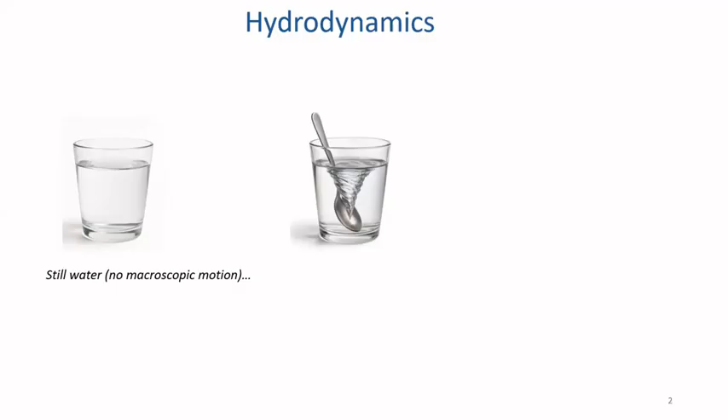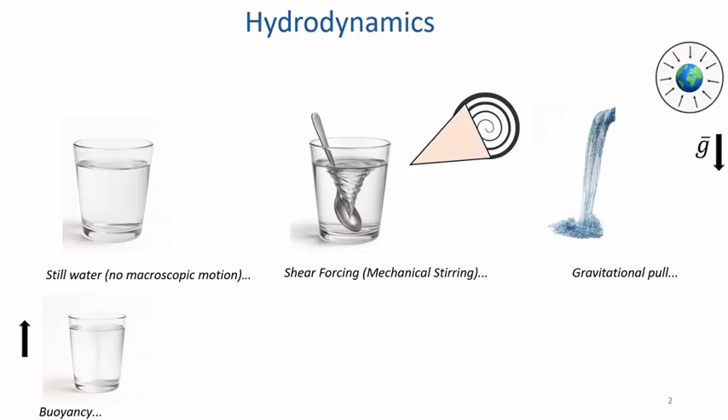Similarly, when you have your cup of water or your cup of favorite carbonated drink, you can sometimes see bubbles rising from the bottom of the cup to the top of the water. This is because buoyancy is acting. The less dense gases at the bottom rise to the top, if you are familiar with Archimedes' principle. And then if you have a pump, a pressure tank, because pressure varies with height, you can induce different degrees of motion with a pressure gradient. So this gives you an overview, in a layman's language, not in a strict mathematical sense, of what we mean by hydrodynamics.

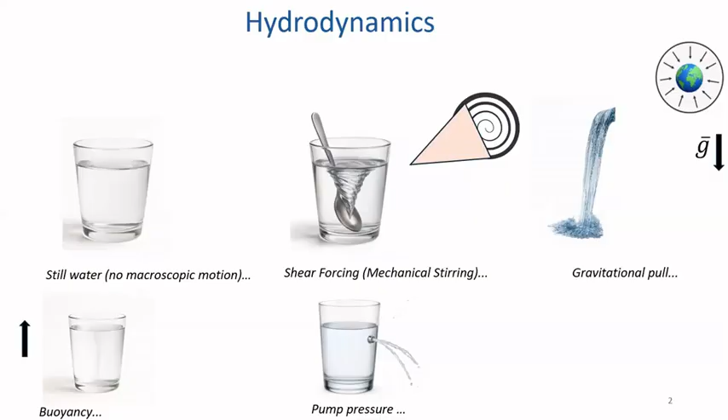And then that takes me to hydrodynamic instabilities. They are instabilities that develop when fluids are in motion. Of course, that seems straightforward. We have seen that mechanical action can cause motion, pressure can cause motion in fluids, but these different motions can also trigger hydrodynamic instabilities. And there are different types of hydrodynamic instabilities that can be observed. To conceptualize this, I give you one of the popular ones, called the Rayleigh-Bénard instability. It is an instability that is observed in fluids when you heat the fluid. And what is an instability?

An instability is a change of state when a fluid is in a reference frame, initially stable, and because perturbations to it grow in time and space, then it becomes unstable.

So this is your favorite pot on the heating surface. No heat is applied. You see that the pot is still, the water in it is still. But the moment you apply heat to the bottom, you will see this kind of cellular motion that is induced.

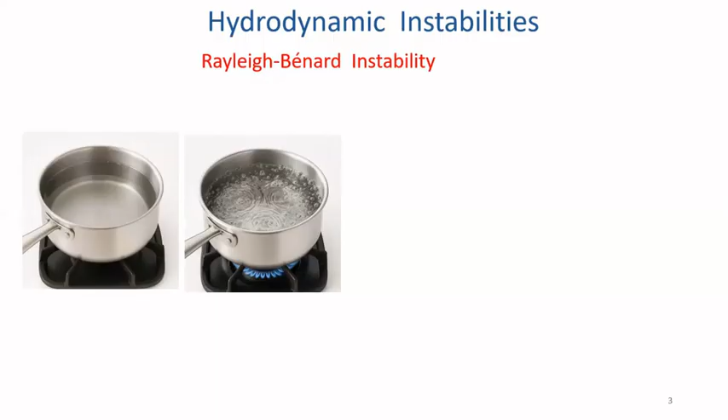What is happening here is that as you apply heat at the bottom, the water at the bottom expands. And because it expands, you have something that is less dense. And then at the top, the water is initially cool, so which is denser. So the difference in temperature triggers difference in density, and then you see this.

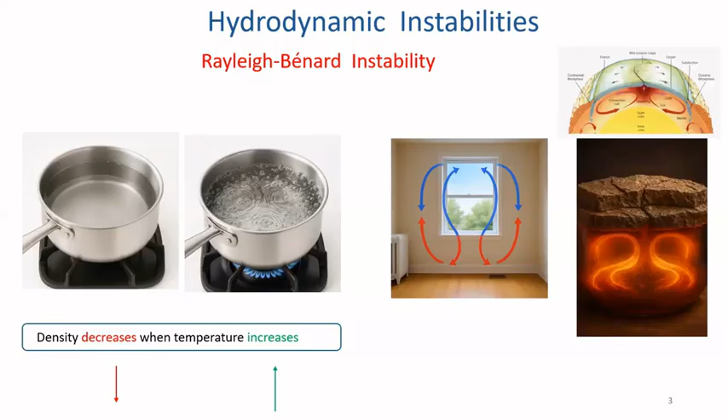And this is what is responsible for circulation of air in a room, for example. The blue arrows: if you're in a room that is initially cool, and then you apply a heater at the source, the hot air rises to the top, and then the cooler air that is initially in the room tends to sink downwards. So this kind of creates a circulation and makes instability happen. And this kind of mechanism is also responsible for transport of minerals within the Earth's mantle.

Another type of instability is what is called Rayleigh-Taylor instability, which was first studied by Rayleigh, and then it was advanced by Taylor. For you to understand this, let's say a glass of water, and then you put some grenadine on top. You know, there is water inside there, but then you are adding something that is increasing density at the surface, at the top. So you have something that is denser on top of something that is less dense.

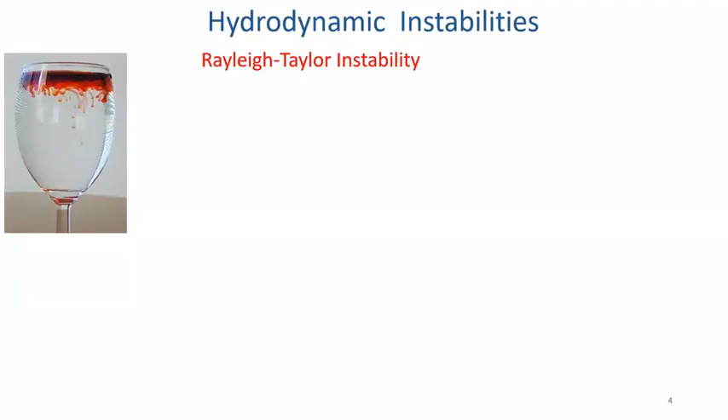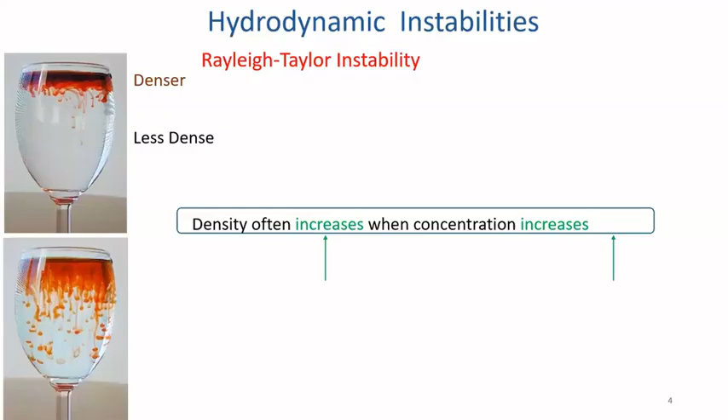Previously, we have seen change in density due to temperature difference in Rayleigh-Bénard instability. Here, the difference in density is triggered by change in concentration, change in mass. So the same thing happens when you put milk in your cup of tea. So you can see this kind of wiggling instabilities. So we have something that is denser, and density increases when concentration increases. And this is also responsible for explosion in the galaxy and for some inertial transport.

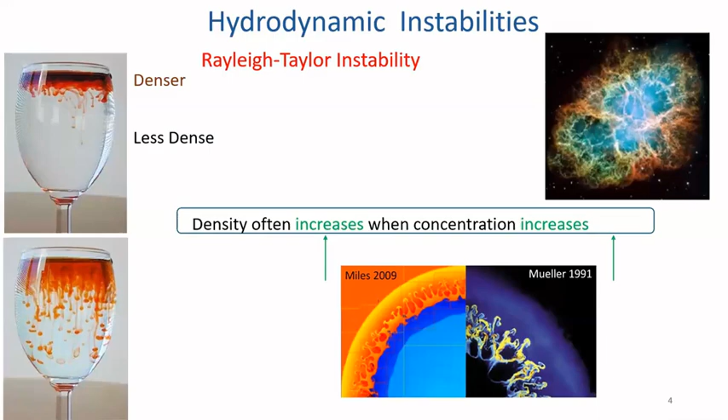Of course, this is still part of the introduction. We have looked at two setups. Now let's look at stratifications that are generic. We are not looking at coffee. We are just looking at something generic. So suppose you have a solution. In chemistry, a solution is a solvent plus a solute. That is, you put a solute, let's say a powder, you put it in water and you mix, so you have solution, different kinds of solution. Can be salt solution, can be acid solution, base solution. Your cup of tea is a solution. Your soup is a solution.

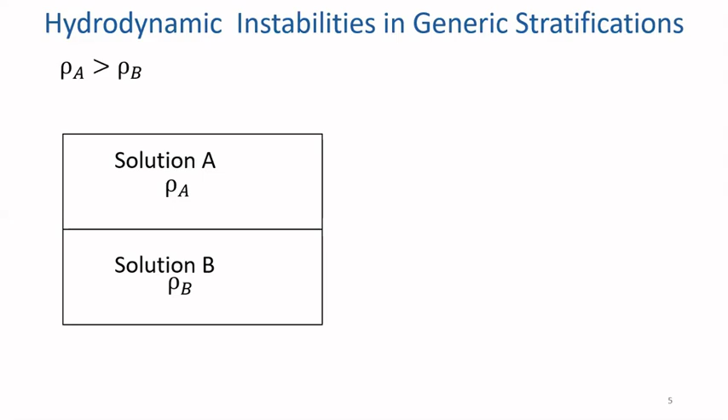So you have a generic solution A, with concentration A and density rho A, stratified over another solution B with density rho B. Based on the previous explanation, in this stratification, if the density of what is on top is greater than the density of what you have below, then you are in the Rayleigh-Taylor instability configuration. And when you do a cross-section of the profile, you have this kind of 1D profile where you have something that is denser, rho A equals 1, and for illustration, rho B equals 0.8.

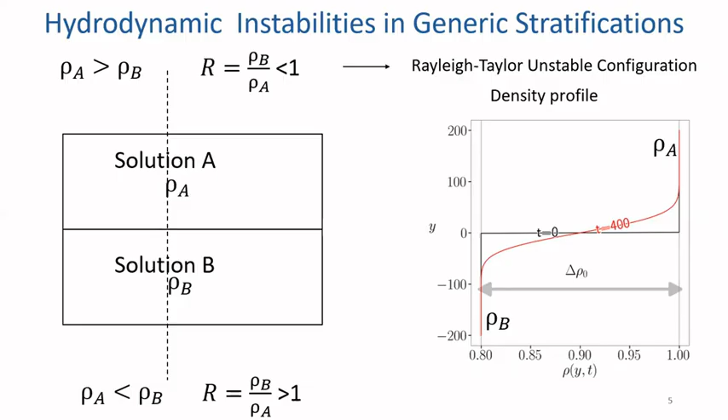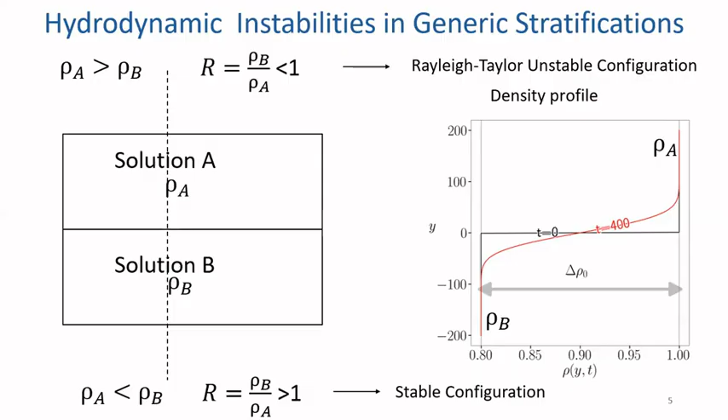In the reverse case, if what you have above is less dense than what you have below, then you can define a parameter R, which in this case is greater than 1. And for this configuration, the stratification is stable. This means that we do not expect instabilities to set in. Why? Because there is no favorable gradient in density to trigger convection. But in this kind of setting where the configuration is stable because of density stratification, there is another mechanism, which we will see now, that can destabilize this stable configuration.

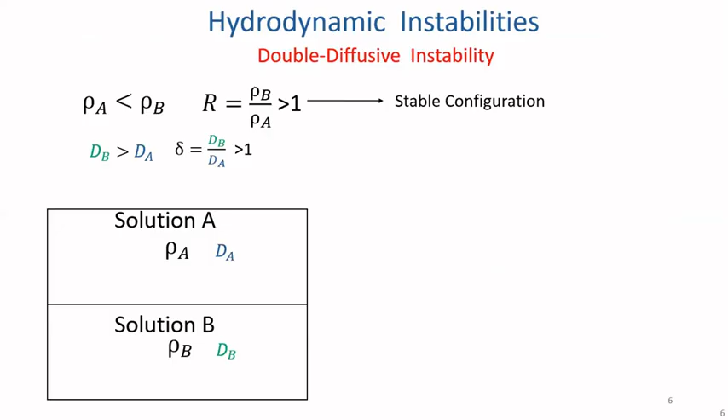And that takes me to double diffusive instability. This configuration, where what you have below is denser than what you have above, is stable. But if, in addition, we are not just looking at the density difference, but at the species dissolved in the solvent that diffuse at some rate, following Fickian diffusion, which is what we'll be looking at in this discussion. And it happens that the solutes in the solution below diffuse faster than the solutes in the solution above. We can then define a parameter, delta, which is greater than 1.

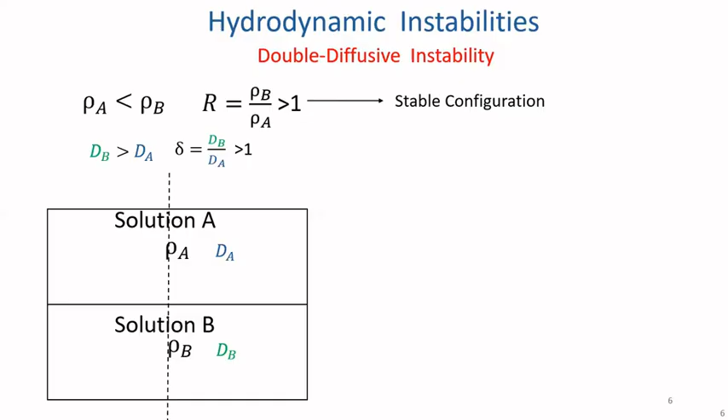Although the configuration is stable according to density stratification, the difference in diffusion rate of the solutes in the stratifications will trigger what you call double diffusive instability. And the signature of this kind of instability is that instead of a monotonic density profile developing, you have build up of extrema, that is maxima and minima in the density profile.

Initially, there is a density difference that we call delta rho naught, which is the density difference at the beginning. But once you incorporate the contribution of diffusive effects, then the actual relevant density difference is this bigger density difference that is called delta rho m. I hope you are following me.

Now, for you to appreciate this, what is happening is that the species are diffusing faster at the bottom, but that is creating a depletion region. So you have a minimum in density and an accumulation region at the top. So as B is leaving the bottom and diffusing towards the upper strata, A is filling those gaps that B leaves behind. And that's why you have extrema in the density profile.

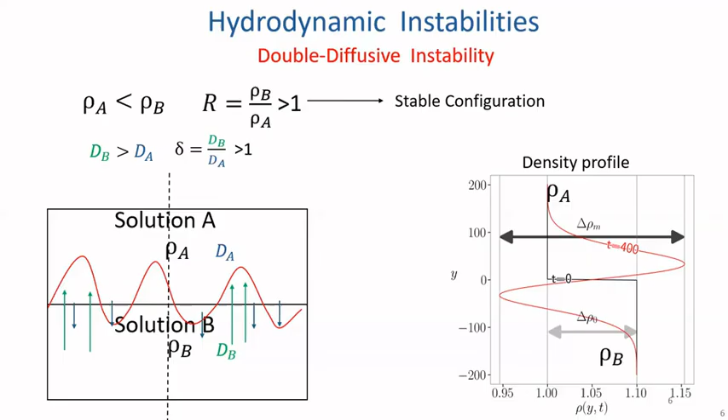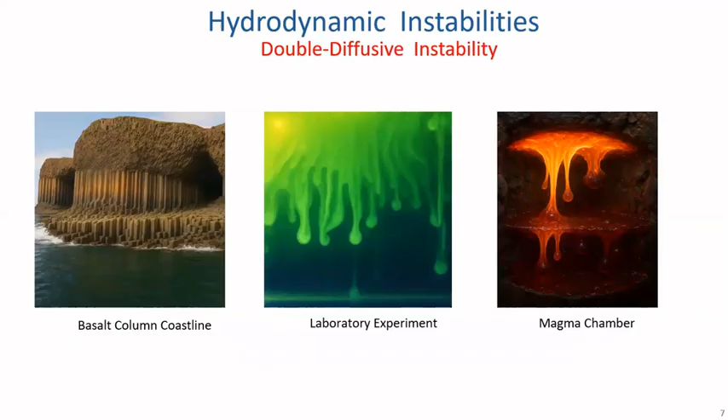And this kind of double diffusive instability, you can see it in transport of salt in oceans and in magma chambers, and it's been observed in several experiments.

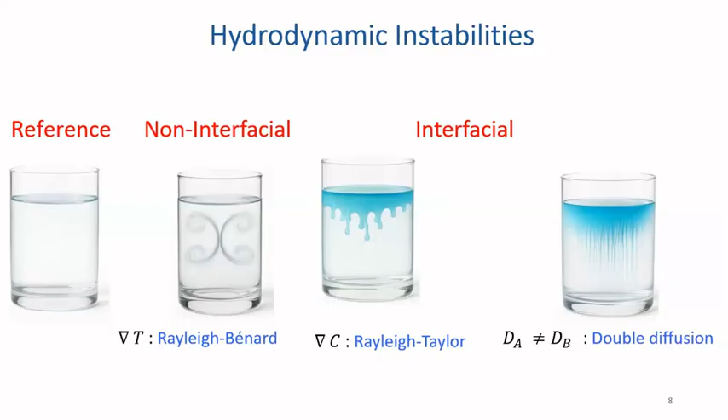In summary for this introductory part, I have introduced you to the concept of hydrodynamic instability, and in particular, I've emphasized interfacial instabilities, which are instabilities that develop at the interface of two fluids, which can happen if there is a difference in temperature, the Rayleigh-Bénard configuration; if there is a difference in concentration, and then a difference in density, you have the Rayleigh-Taylor instability. And if the species diffuse at different rates, then you have the double diffusive instability.

Why is it important, you may be wondering, to study this kind of system? One of the reasons why it's important to study this kind of system is that it helps us to mix two fluids. What does that mean? Look at this simulation, for example, which is what I've been trying to explain. We have a fluid A layered on top of B. Initially, they are diffusing into each other, which is the green region in the interface.

And as time passes on, you see the deformation of the interface into finger-like patterns. And then the two fluids begin to interpenetrate into each other. What happens is that these fluids begin to mix. And what does mixing mean? It means concentration begins to be homogenized in space and time.

This is useful because you just make your stratification. The only thing you put there is density difference because of the choice of the solutions that are stratified, and the fluid mixes by itself. As someone would say, this is an energy optimization problem. You are not putting something there.

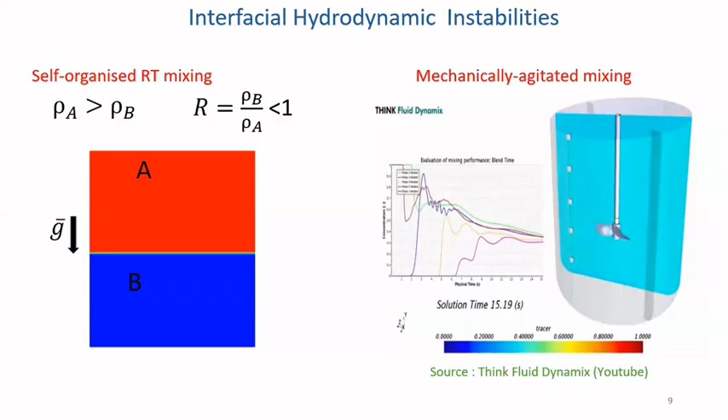This is in contrast to what you do with your blender when you are cooking in your kitchen, for example. You need to turn the blender, and to turn the blender, you need an electrical source to mix your recipe, whatever you're doing. So this can be useful in cases where you are producing pharmaceutical products that, when you shear them, when you apply mechanical action to them, you can destroy the relevant constituents in them, among other applications. And even in CO2 sequestration, maybe if time permits, so that I don't stay too much in the introduction part.

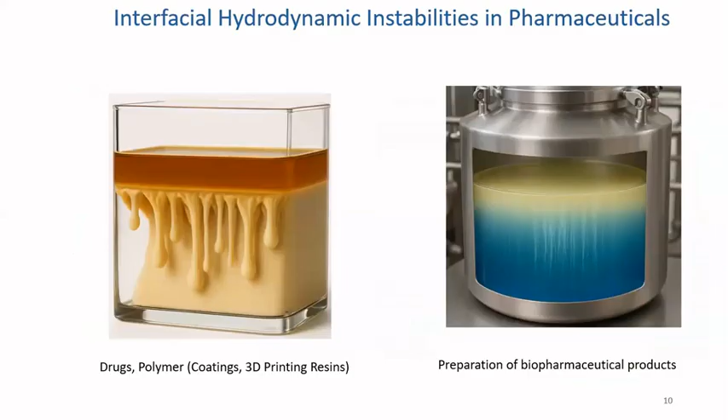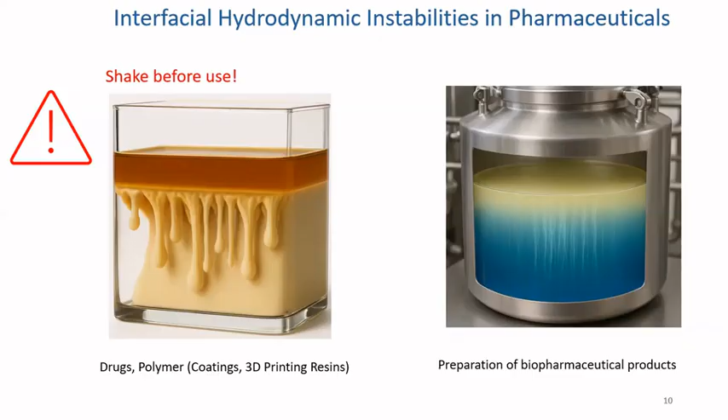So these are some of the applications, and this is a pharmaceutical application, for example. And I know you must have seen on drugs the notice shake before use. Why do they say this? For example, if what you have is some emulsion, if you let it sit on the table for some time, you can see that it separates into layers. So if you just drink what is at the top, then you are drinking what may not heal your body. So those are practical examples. Of course, there are different examples that we can use.

So what do we want to answer? According to the topic, we want to look at the role of diffusion and the role of chemistry in influencing, in controlling the mixing that we have, and how can we choose the parameters that help us to control the mixing, and also importantly, how can we determine a priori that, okay, I want this degree of mixing.

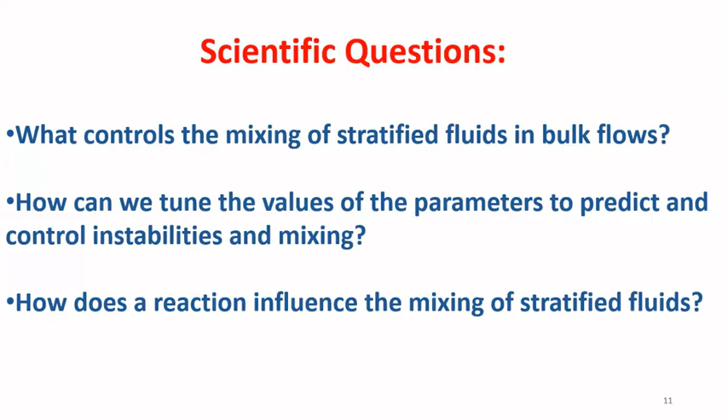I want my mixing to start by 10 seconds. I want it to start, no, much later. I want it to start by 1 hour after stratification. I want it to be this fast. What are the things that we have to control? So these are the scientific questions.

And this takes me to the framework for discussing my research, which is chemohydrodynamic instability, which summarizes the introduction again. You have a concentration gradient, a difference in concentration, that triggers a mobility profile, which is density, viscosity, permeability, and then triggers hydrodynamic instabilities, which induce hydrodynamic flow.

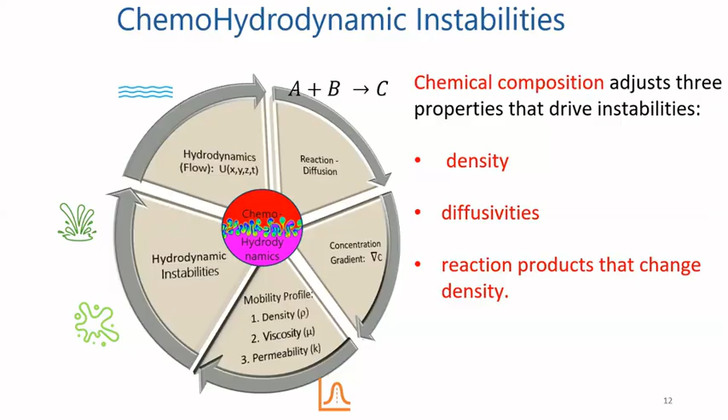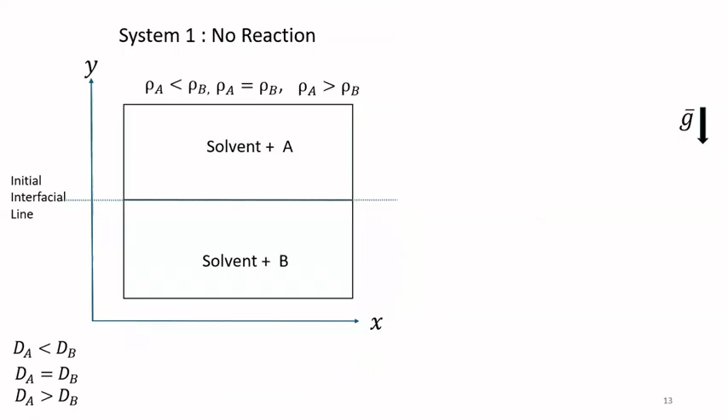And sometimes we will see that reaction, just like diffusion, can trigger instabilities in some framework. And in this case, it will be important for us to see how reaction influences things, changes the density profile, etc. We will get there.

So I will first look at system 1, which I've shown you, solution A on top of solution B, and we'll look at what if solution A is less dense than B, what if they are equally dense, what if this is more dense, and we'll look at difference in diffusivity. And then system 2, we'll look at the situation where the solutions are reactive and they are producing a new product in situ, on the go at the interface.

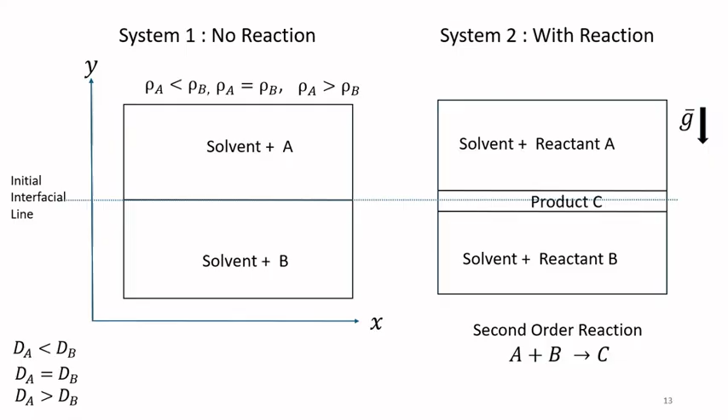They are synthesizing something. For example, from high school, if you do an acid-base reaction, you produce salt, a salt solution and water, among other things that you can produce. This is modeled by the second order reaction, A plus B gives C.

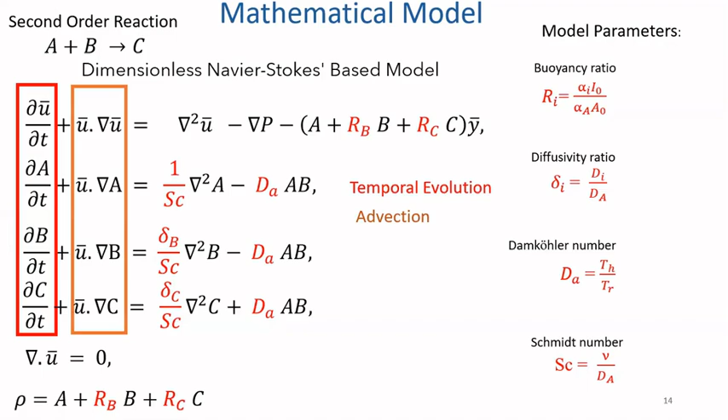The terms highlighted in red account for temporal evolution of the velocity and concentration. As the velocity is changing, the fluid becomes entrained and the concentration is advectively transported. So you have this highlighted term accounting for advection, diffusion and temporal evolution. And this highlighted term in purple are the reactive terms.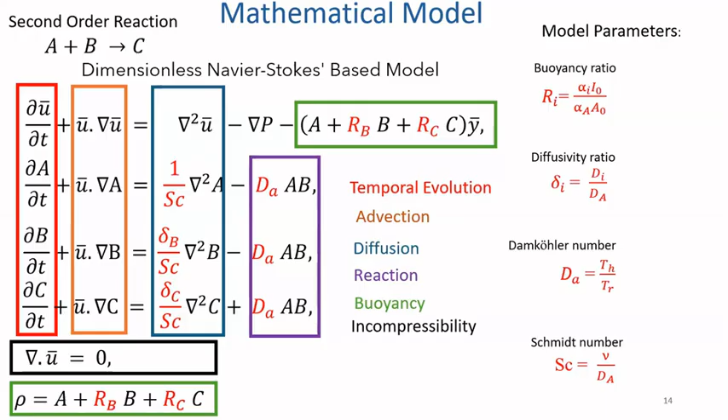And for the action of buoyancy, that is, you are in the gravitational field, this accounts for the buoyancy force on the fluid. And like I said, we are solving this under the assumption of incompressibility. This essentially means that we are looking at solutions that behave more or less like water. We are not looking at gas that expands uncontrollably. We are not looking at combustion. So there is incompressibility there.

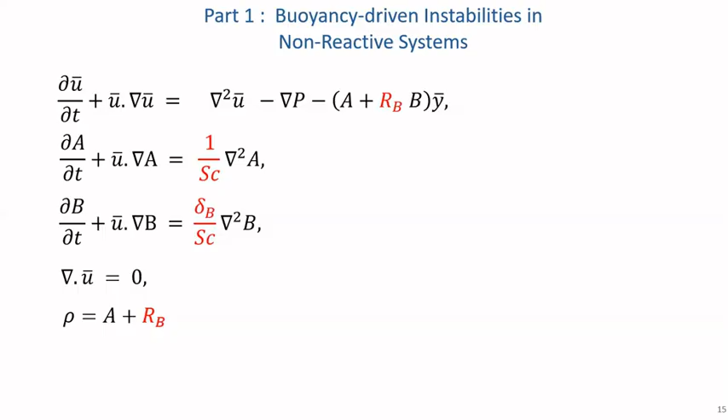Okay. For the first system, we look at the non-reactive system, part 1, so we take the reactive terms away. So no reaction. You have the Schmidt number, the delta parameter. And for this simple system, when there is no reaction, if my R is greater than 1, I think you've seen this before, my system is initially stable. I do not expect instability.

On the other hand, if it's less than 1, it's the Rayleigh-Taylor instability, RT, that I've shown to you. And if delta is greater than 1, you can have a double-diffusive mode. If it's greater than 1, I remind you again that what is below is diffusing faster than the species at the top. But when delta is less than 1, what is below is diffusing slower than what you have at the top.

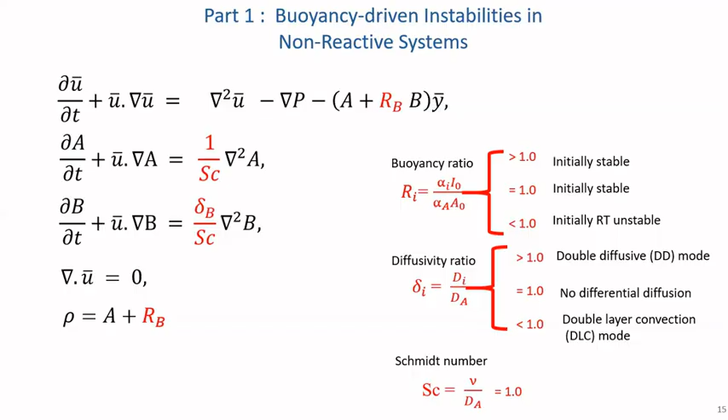For simplicity, we fix the Schmidt number at 1. Typically in real-life applications, you have the Schmidt number of chemical solutions around order of 100 and 1,000, but this may make the solution stiff. We have solutions for that which I will not present, but let's just keep it simple.

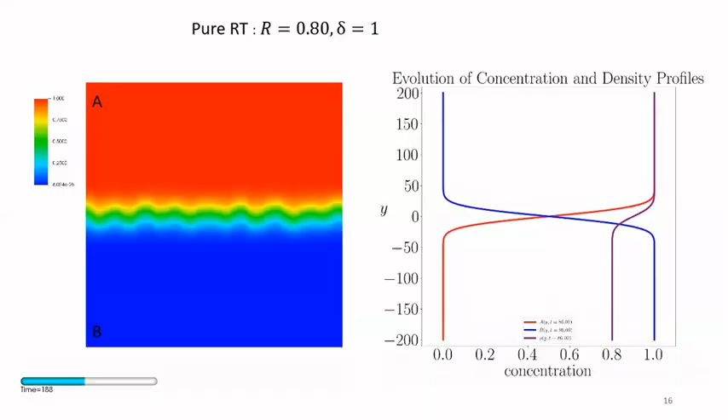So you've seen this that I introduced to you earlier, and this is the deformation of the interface because of the action of the diffusion. The fluid is diffusing into each other, and then you have A and B. And then when you do a cross-section, you have your A, you have your B, and then the density profile, which is a linear combination as defined in this problem of concentration of fluid A and fluid B. So let's leave this.

For the Rayleigh-Taylor problem, R less than 1, delta equals 1. That is, there is no difference in diffusion rate. The only difference is that the two species have different densities. By just varying the values of R, we can see that we can already influence the mixing. If R is closer to the value of 0, we see that at time t equals 125, the destabilization of the interface happens much earlier, and then the homogenization is

fast. But when R is closer to 1, which is closer to the stable value, there will be destabilization at the end of the day, but it's more delayed. So for me, I'm happy that I can choose solution pairs based on my goals to delay or to enhance mixing based on the density stratification alone.

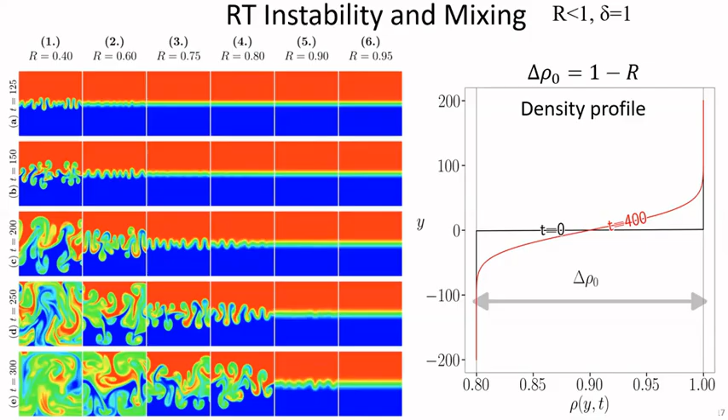And for you to appreciate these qualitative results, we follow this mechanism where we define what we call the mixing length. And what is the mixing length? The mixing length tends to measure the degree of interpenetration of the fluids into each other. Early on, we have diffusive mixing. So this grows as square root of time, which is classical and characteristic of Fickian diffusion.

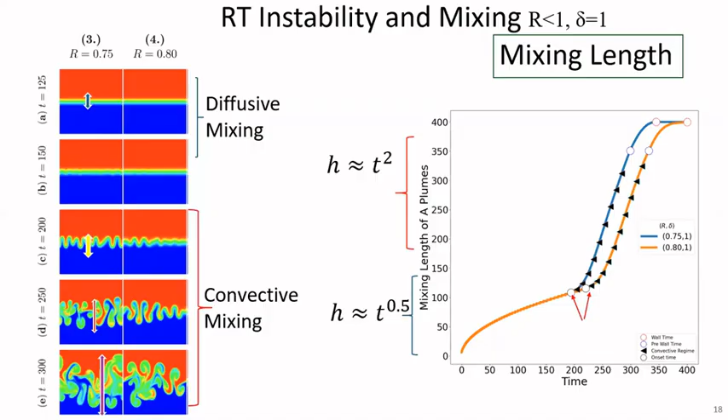But later, when convective motion sets in, then we see a motion that grows as a quadratic function, the interpenetration of the fingers. So this is characteristic of free fall motion. If you remember your physics, this is characteristic of free fall motion when the distance h is equal to half g t squared. But there are theories for this. And why do we measure?

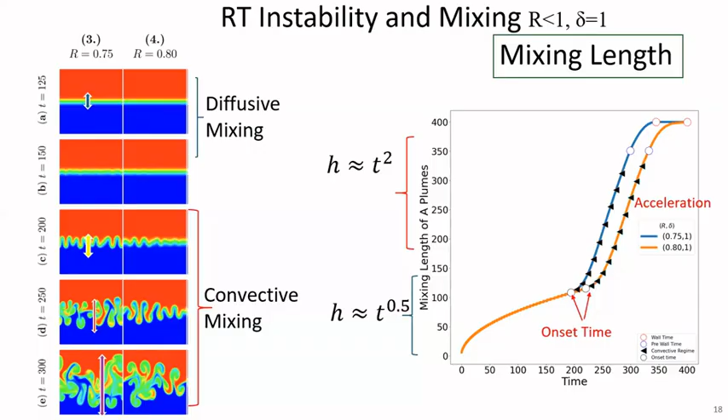Based on this quantification, by following the evolution of the interface, we can already define the onset time, the time that the mixing transitions from diffusive mixing to convective mixing. And we can also quantify the acceleration, how fast the fluids are going into each other, by looking at the slope of this curve in the convective region. So these are our quantitative parameters. We've defined this density difference.

Okay, and what we find is that there is indeed a correlation between the time that the instability sets in and the initial density difference. So this is a power law. So without doing the experiment, I've done the experiment. You just have to come to my results. Or to have my instability set in at time XYZ, you put it into this parameterization and you have your result.

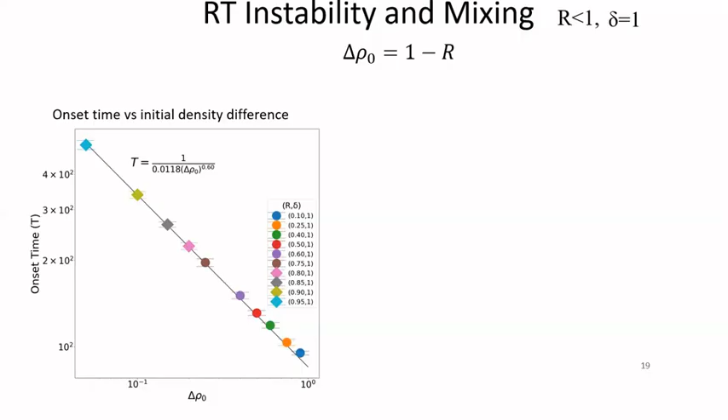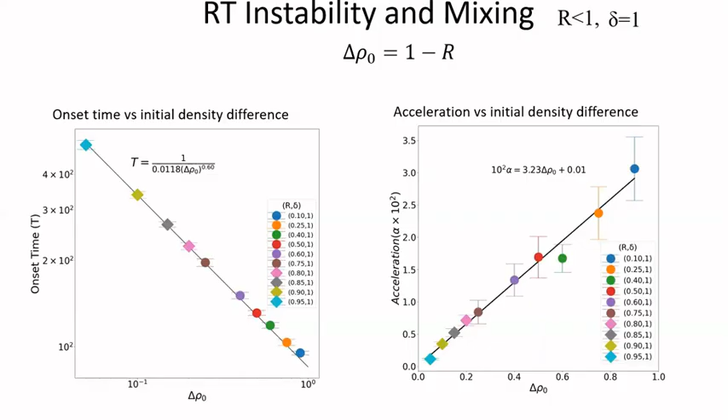Similarly, the degree of acceleration also scales as a linear function of the initial density difference when you have an RT configuration. On the contrary, when there is double diffusive motion, like I've said, we are no longer looking at delta rho naught, which is the initial density difference, but then we are accounting for the dynamic density profile. This you can compute analytically if you look at my paper.

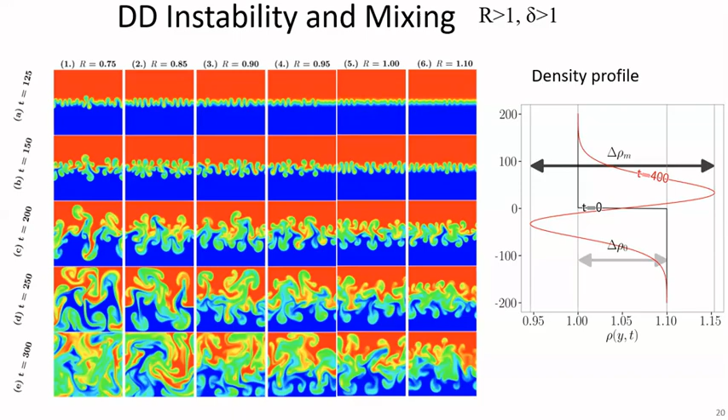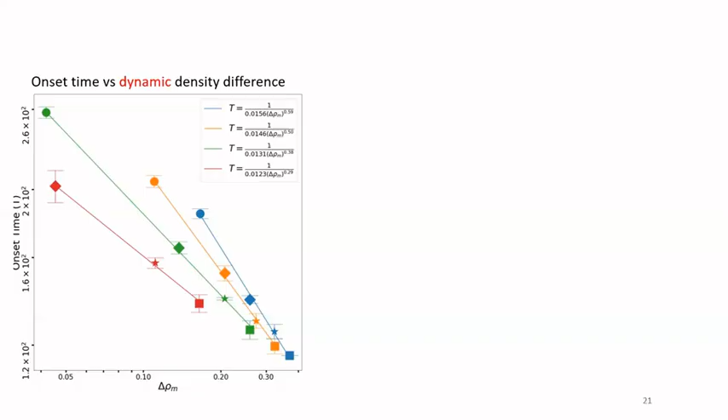And then I will show you now that if you try to correlate the onset time and the acceleration rate with the initial density difference with this kind of setup, you are going to fail. But once we correlate with the dynamic density difference, then we'll find it. You see, the onset time versus dynamic density difference gives us this power law, like we saw in the Rayleigh-Taylor case where there is no difference in diffusion rate. So this is how the density profile looks for the ones highlighted.

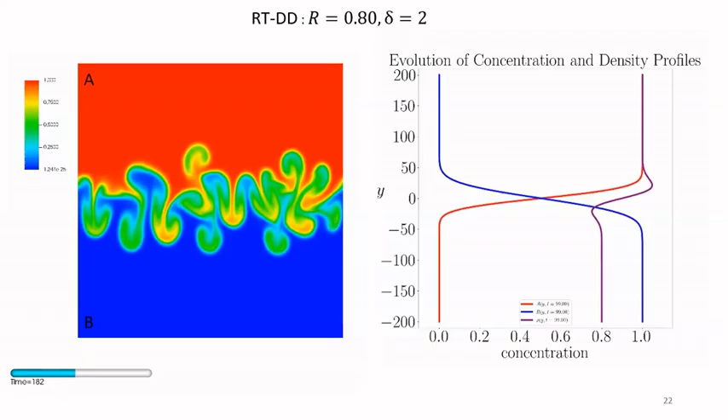And if you look at the acceleration rate, it's delta rho m, that's the emphasis, not delta rho naught that was initially there. And this is just for you to appreciate what is happening. You can see in real time that there is a build-up of minima and maxima in the density profile. It's no longer monotonic, but you have a non-monotonic density profile. And so once there is a difference in diffusion rate, you do not control your mixing by the initial density difference, but rather by the dynamic density difference.

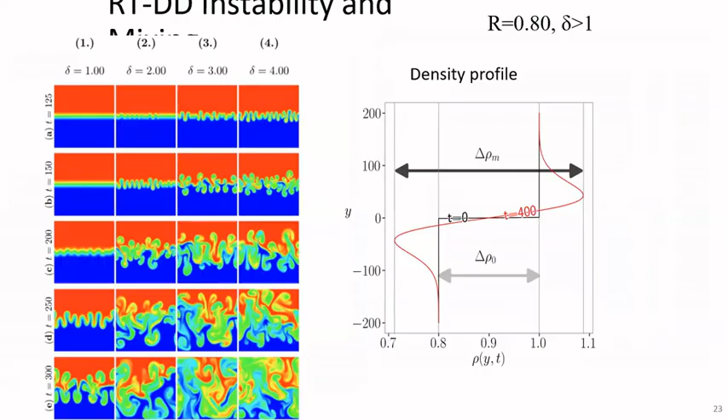Okay, let's leave that. And you can even have more interesting results when you look at the combination of Rayleigh-Taylor modes and double diffusive modes. What does that mean? Delta equals 1 is the reference case, the Rayleigh-Taylor case. But when R is less than 1 and delta is greater than 1, you can see that the mixing can be even much more enhanced, happen much faster.

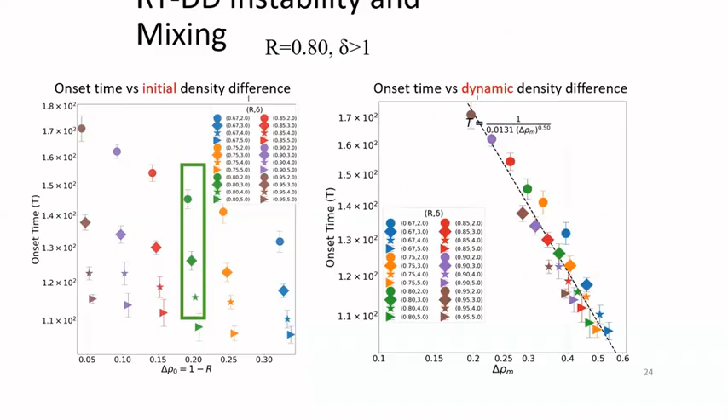And this is the correlation for delta greater than 1. We see a scatter plot when we try to correlate with delta rho naught. You do not see a nice trend. But the moment we recalibrate with delta rho m, we find our scaling again. Same thing goes for the acceleration rate. And then I did a lot of numerical experiments, and this kind of summarizes it. We can discuss this later.

In summary of this part 1, we can see different behavior if the species, the solutes that are dissolved in our solution, diffuse at different rates. If delta is less than 1, the mixing can be much more delayed. If delta is greater than 1, it can be much faster. So the question I ask is, how fast do you want your mixing? Do you want it slower? Do you want it faster? Then you can leverage on this.

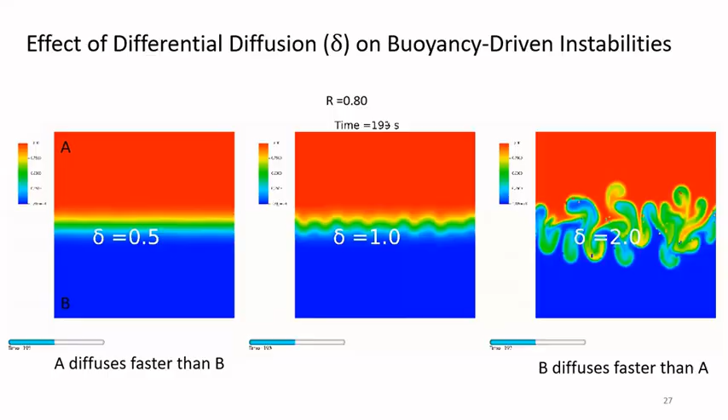Not to waste time on this simulation. I don't know why it's behaving weird, but you can see. Okay, I leave the key message because I've explained this again and again.

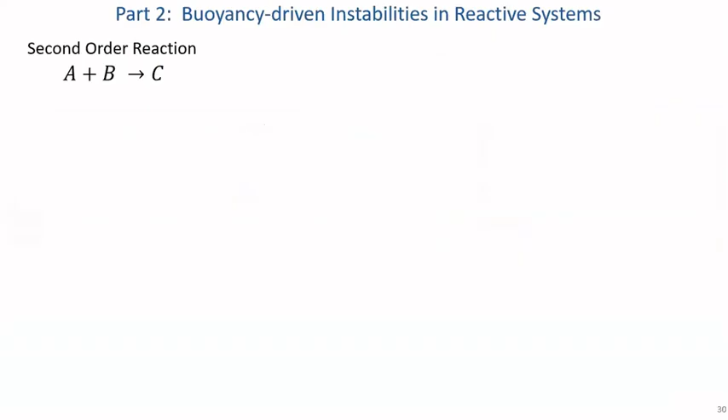Now, you ask, what happens if there is reaction happening? So that takes us to the full model that I was looking at. But to keep things simple, we isolate the effect of differential diffusion. We assume the species are not diffusing at a different rate. We also keep our Damköhler number 1, which means chemical transport, reactive transport, and hydrodynamic transport are comparable initially. So the only thing we want to change is the buoyancy ratio. We have two, RB and RC.

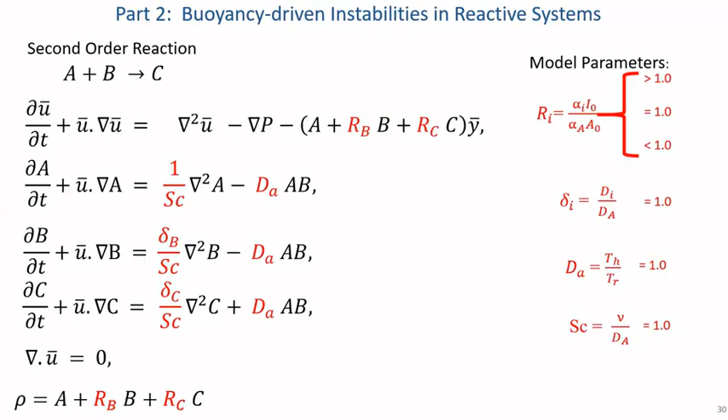RB is measuring the density of solution B relative to solution A, and RC is measuring the density of solution C, which is the new product that is being formed, relative to solution A. So solution A is the reference solution, which is the one at the top. So what happens? In the simple case, if RB is equal to 1.0, which is similar to the R that we saw previously, the system is stable.

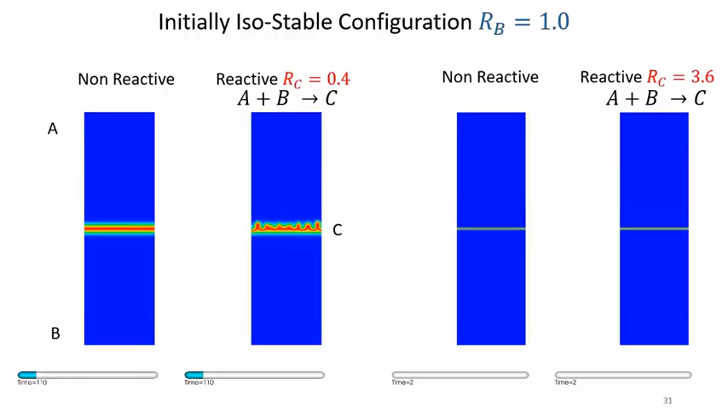But if it happens that a product that is less dense is produced, as on my left-hand side, RC 0.4, the non-reactive case is stable. The only thing you see is diffusive transport at the interface, but reaction is able to break this stability and destabilize the problem. And if a much denser product is formed, we see again that reaction is able to destabilize. But what is the difference? We can also see another control.

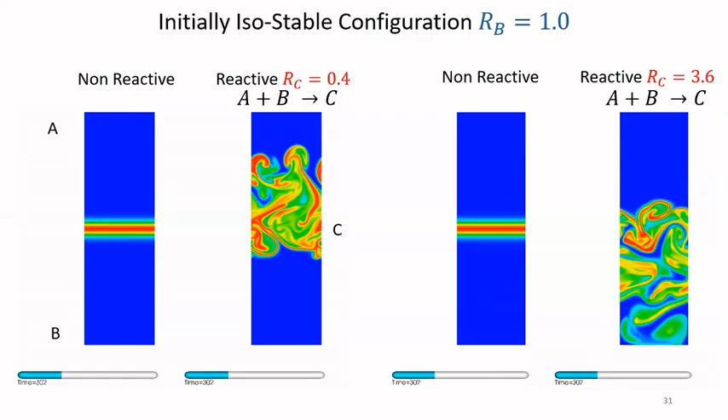I can influence the direction of the propagation of mixing by choosing or synthesizing products. So depending, is this a waste product that you want to flare into the atmosphere or something that you want to transport into the subsurface? So you can leverage this already.

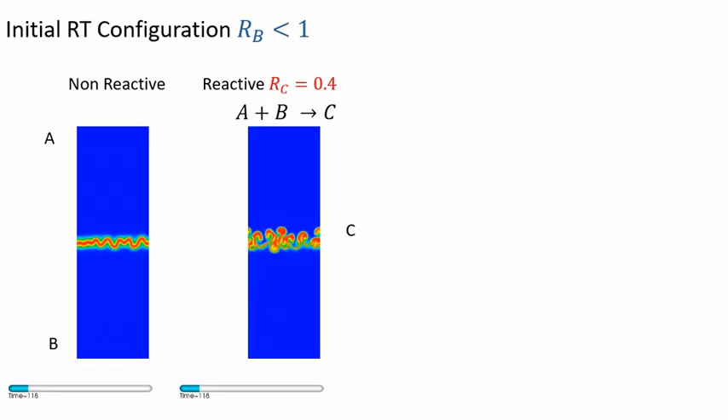And in the RT case that I've shown you, when RB is less than 1, what do you see? In the non-reactive case, you see diffusive propagation and then deformation because it's initially unstable. But then, with reaction, the mixing is much more enhanced. It happens much faster. And let me play this again.

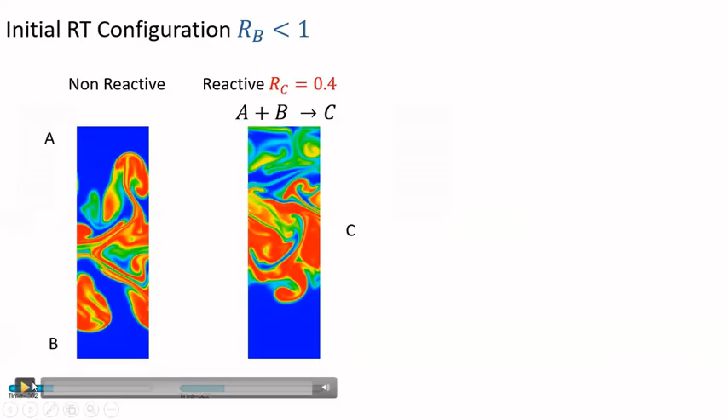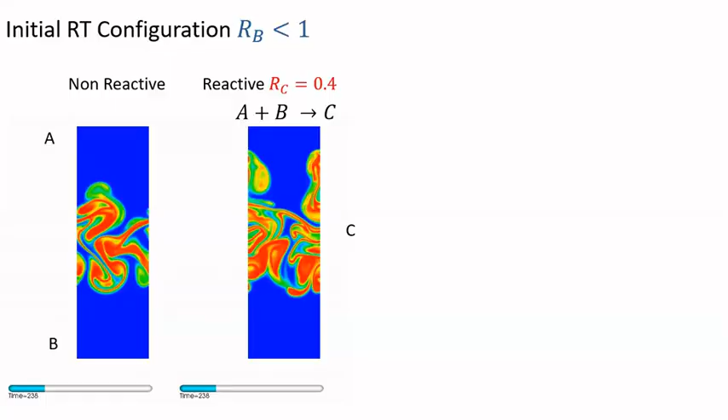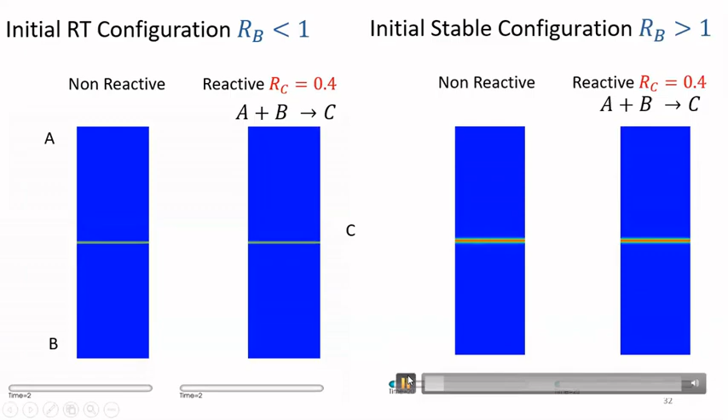In the non-reactive case, the plumes are symmetric. That is, they tend to form symmetric fingers across the interface, but reaction breaks that symmetry. And again, if this configuration is stable, reaction is still able to destabilize the interface. So you want to wonder what is happening. It's similar to what we saw earlier.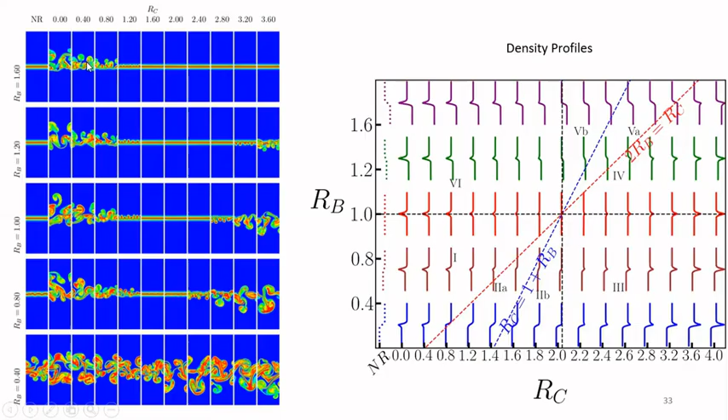And in the stable cases, where the stratification is initially stable, RB 1.6, in some regime, you can trigger instabilities thanks to reaction. Okay, so that kind of summarizes this. And then we quantify these nice patterns that we have seen. At what time does instability set in?

We see that for the non-reactive case NR, instability sets in when it happens to set in. When it's stable, instability will not set in. But when it's unstable and instability sets in, the instability sets in at a time more than 100 seconds. But with reaction, we can see the instability setting in below time 100. And in some cases, we can even delay it.

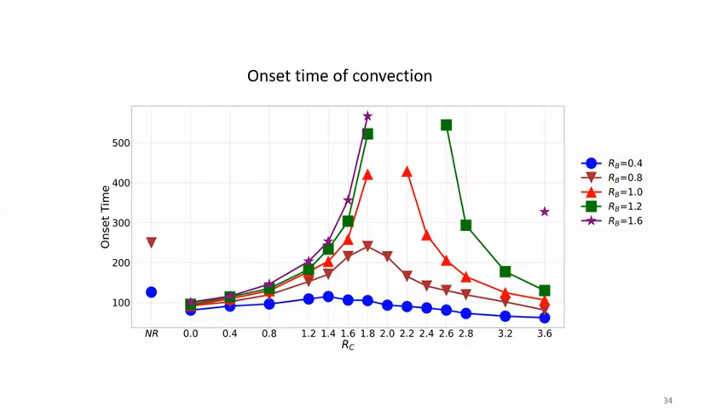So this is a nice way. And the places where there are no scatter points are the places where the reaction is not dense enough to trigger instability. I have told you that we can also influence the directionality of the fingers that form. So this kind of characterizes the trajectory. You can see at early time where diffusion is happening, the reaction zone where the reaction is more intense stays closer to the interface.

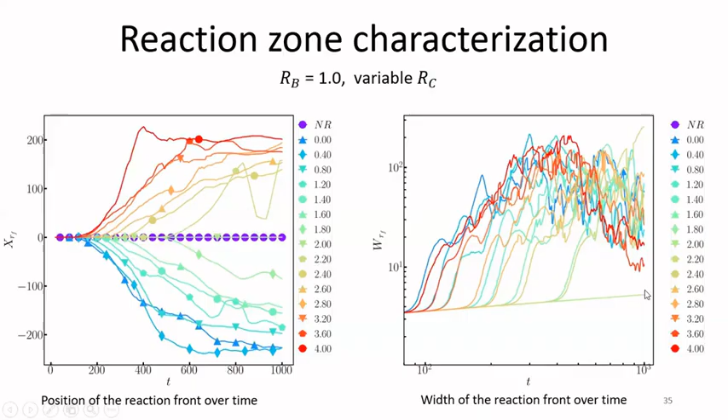And then for some dense products, the finger tends to rise. And then for some parameters, the fingers tend to sink. Similarly, the width of the reaction zone can expand. If there is no reaction, it usually follows a square root of time, but then you can make the reaction zone expand in time. And then for somebody that is interested in mixing, this is a kind of parameter with which we quantify the mixing that happens.

It's called the scalar dissipation rate, chi. And it's designed this way, if you add up this equation and then you do some transformation. So the scalar dissipation rate is just measuring the variance of concentration. How far away is the concentration from the mean concentration? And if you do a volume average of this scalar dissipation rate, then you have this kind of trajectory.

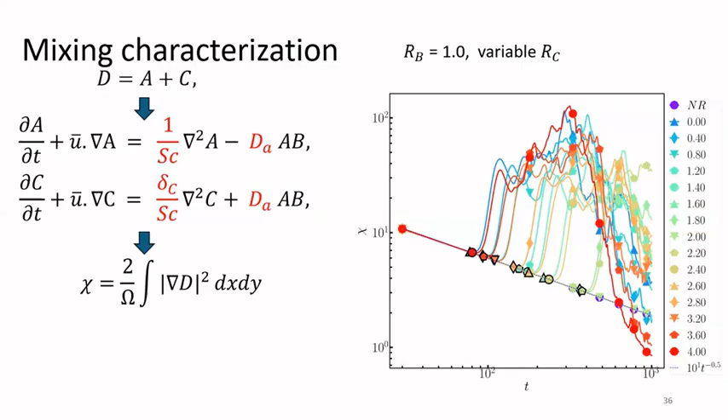What does it mean? How do you know when the fluid is mixed? When the scalar dissipation rate is closer to 0, then the fluid is mixed. When it's closer to 1, it means the fluids are segregated, still unmixed. And with reaction, we can see that it approaches this red dot, RC 4.0. With reaction, the mixing closes faster for some parameters than for that parameter. Of course, I have different plots, but I cannot show the results in this talk.

And then from a chemist perspective, we know that something is being synthesized at the interface. How can we quantify the yield? I remind you, what is being formed, depending on application, may be a useful product or something that is harmful, that you want to suppress its formation. And we see that when the stratification is initially unstable, RT unstable, the product yield is much more enhanced. You form much more new products.

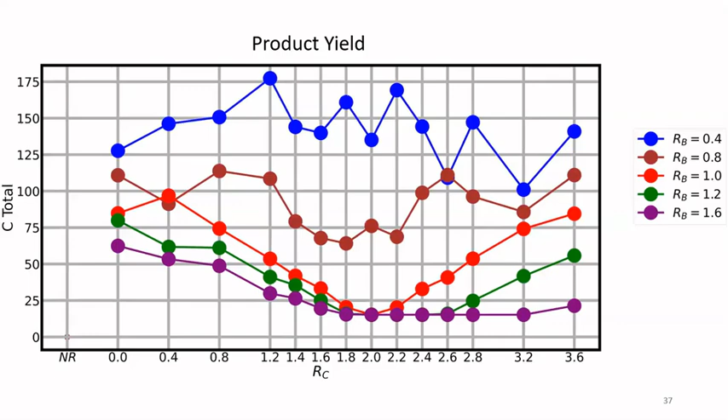And when the stratification is initially stable and reaction is happening at the interface, you form some product, but it's not as intense. So depending on application, you can already choose your stratification to end up in some regime. And the key message is that compared to non-reactive cases, reaction enhances faster onset of instabilities and intense mixing. Unstable reactive mixing is more efficient in product yield than stable reactive mixing.

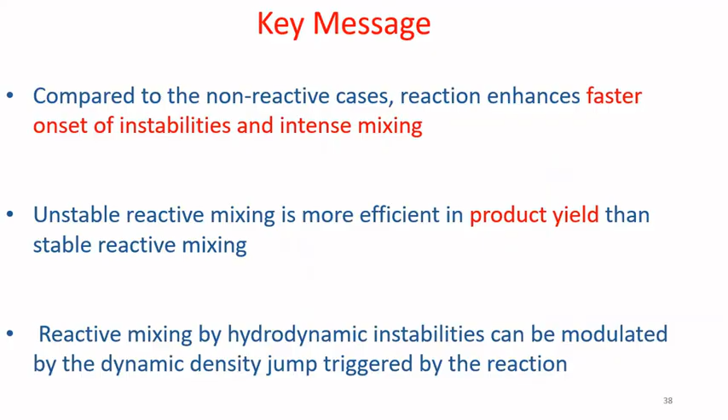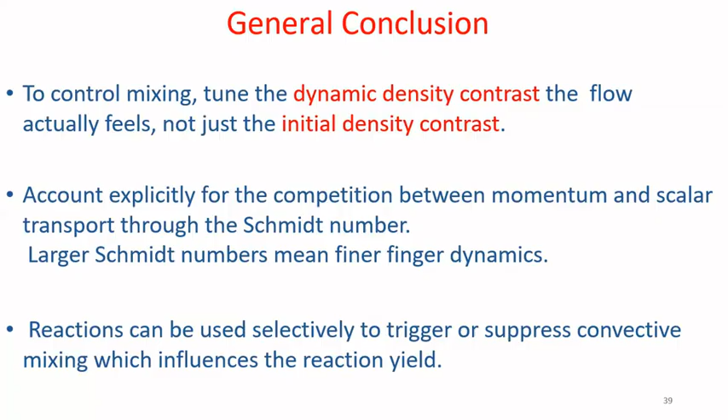And reactive mixing you can modulate by tuning the dynamic density jump that is triggered by reaction. And as a general conclusion, there is the initial density that the fluid feels, but then there is a dynamic density difference that the fluid feels because either the species diffuse differently, or there is active reaction happening. It's usually useful to account for this dynamic density difference to be able to make predictions about what happens. And then you can use reaction selectively to trigger or to suppress convective mixing and influence reaction yield.

Okay, I think I'm going to stop here and then allow people to ask questions.